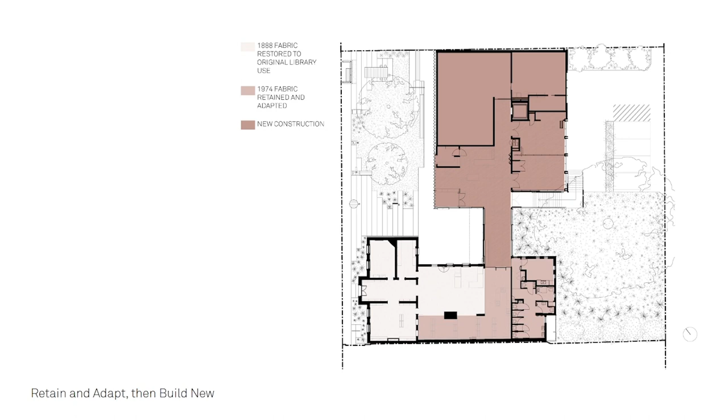This diagram shows the spectrum of intervention into the existing fabric. The front library has been retained, and we have reinforced the 1888 building's original form by inserting our new connection behind its roof, shown in the palest pink. The next level of intervention is the 1974 fabric, which we did more to and cellularised, and then the new construction is to the north of the site. And then these are both separated by a breezeway wing, which was a really early move to create an interval between the two buildings.

It welcomes visitors to the canopy of the fig tree, and a series of outdoor spaces are defined by our building elements. We have a more formal street park to the front, a sunny outdoor courtyard, which the breezeway spills out into and can be an event space. And then the more informal revegetation underneath the canopy of the fig tree to the rear. The rear of the site doesn't lead to a proper laneway, it's sort of like a truncated exit.

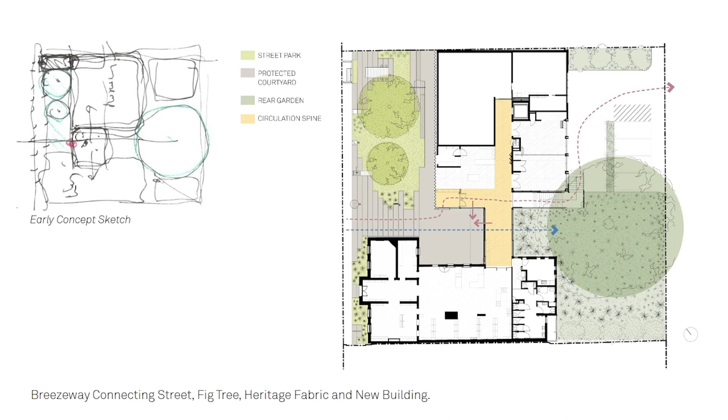The change in height across the site has been leveraged to occupy the canopy of the fig tree and to create an opportunistic undercroft space, spill out space at the lower level, which you can see there. The breezeway spine opens up to spill out into the courtyard in good weather. Its transparency creates a clear visual gap between the existing and the new.

And our new building is set back to retain the existing park interval so that the primacy of the predominantly heritage street is maintained. And our new building is also a little bit lower than the adjacent heritage buildings as well.

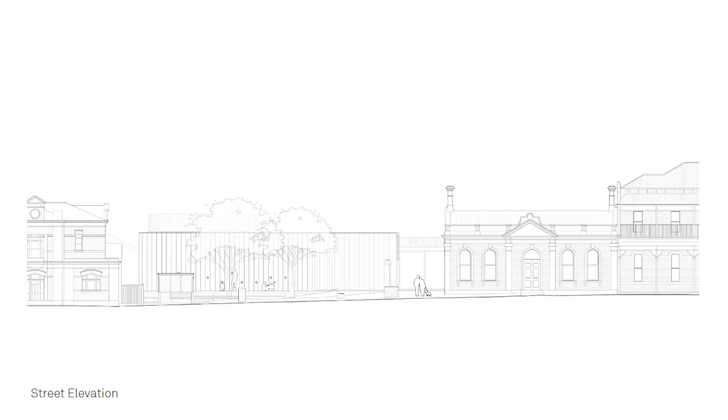Elaine Heumann Gurian talks about the potential of museums to be catalytic community placemakers. They are for gathering, research, celebration of culture and making new connections. The cultural functions of libraries and information centres further align with this purpose, and as Corrina Eccles reminds with the building name, they are also spaces about listening and learning.

So we tried to find ways to support this richness of community activity, which can be hard to do through a necessarily closed museum façade, especially a small volunteer-run museum with limited opening hours. So one move we made was to introduce a simple 24-hour museum by introducing peepholes as a playful façade engagement strategy, allowing a little peek into history any time of the day. So these are dotted across the facade and they contain small artefacts and digital displays.

The entire street park, in fact, can be conceptualised as a museum of cultural artefacts. Heritage buildings, heritage street furniture have all been preserved. There's living heritage in the trees, and we also reintroduced more local plant species back onto the site. A new interpretive plinth is to be designed by a Wadawurrung artist, which is still in progress, and will mark the main entry to the site.

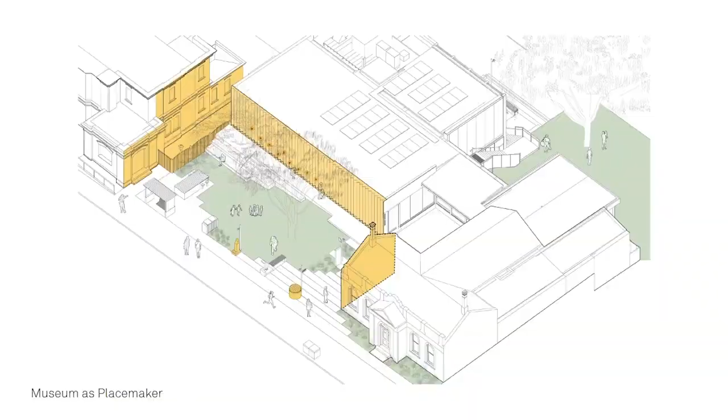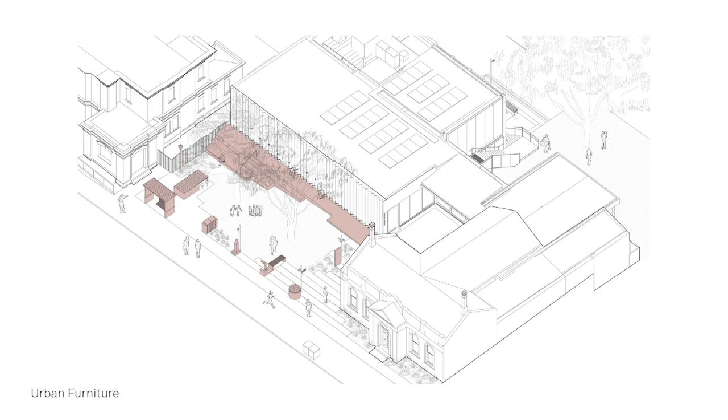The serrated glazing is a pretty oblique reference to the region's maritime history and a celebration of the Fresnel lens. Its panes refract the adjacent heritage buildings. Bus stops, bins, seats, signage and water station are organised into a series of bespoke urban furniture elements that define the footpath and building edges framing the park.

The main entry to the building is from the courtyard space to the north of the courtyard, and then each part of the building is connected into a spine which runs all the way north to south. The building program has been distributed to suit the needs of each organisation. So early on it was established that it was appropriate to retain the library in its historical location, and we were able to move it back into some of the front rooms that it had been pushed out of. The Visitor Information Centre occupies the central zone in the most public and welcoming location, and it has the opportunity to spill out and use the circulation areas.

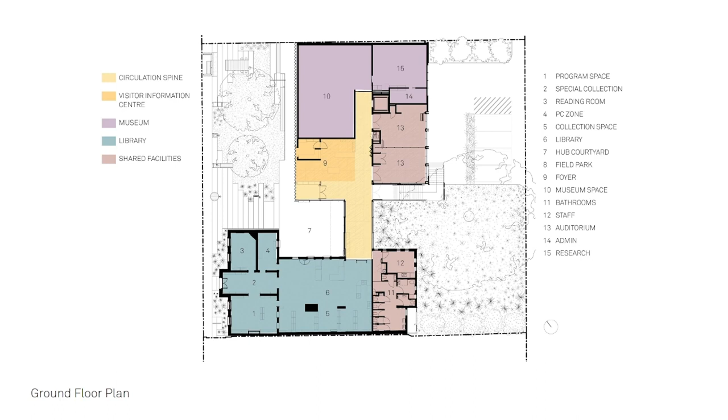The museum is to the north, where it has better security and climate control. And then there are a series of shared spaces, so public event gathering space that can be booked by the community, which overlooks the fig tree, number 13. And then to the south is public toilets and staff areas. And so these provide more than if each organisation had been trying to do it on its own. In the lower floor, it's quite a reduced footprint, so just some museum storage spaces and that opportunistic undercroft space that we tried to maintain.